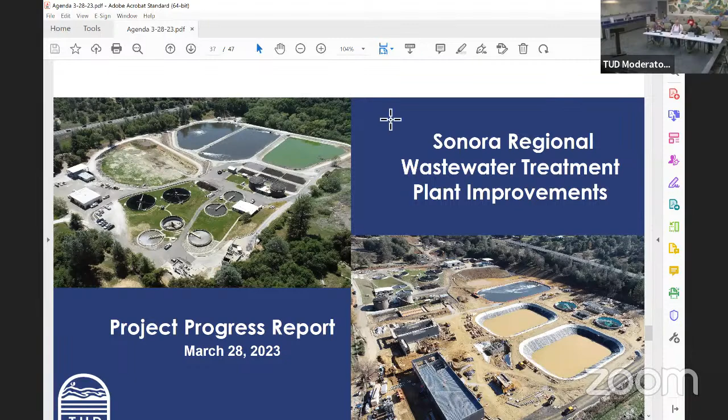I do want to let you know that Jennifer, who really should be the person giving you this report, happens to always be at a meeting at the job site on Tuesday mornings at this very time. She is essentially full-time. We've pushed some of the other capital projects; this is one of 20 capital projects we have on this year's schedule. We've tried to take some of her projects and shift those over to other staff people to really dedicate her time.

We also have our inspector on site, which is a contract. Mountaineering Engineering is also there, sometimes more than full-time. He does have overtime from time to time. And then as well, PACE, Pacific Advanced Civil Engineering, our design engineer, also has at least one staff member full-time. In addition, we have support staff here on the operations side with Michelle and Eric and the treatment plant operators, and Steve and his department in terms of processing payments. So we've got a lot of people involved in the project.

I would say most agencies probably have more than just one person at the staff level dedicated to a project of this size, but Jennifer's extremely efficient with her time. We're providing a lot of good value to the ratepayers on this project by trying to minimize our overhead and soft costs and maximize the amount of dollars that go into actual construction.

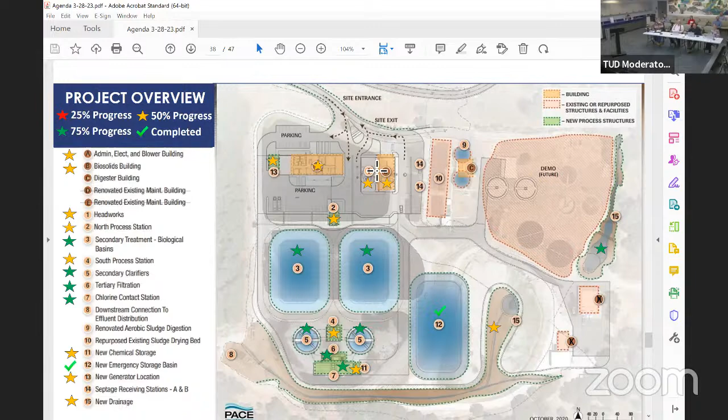Our monitor is not changing as you're— No, I'm trying to, I'm moving my mouse, and when I move it, it's got a lag. So I apologize, I don't see that. And it's not very bright either. Yeah, the mouse. Yeah, we don't see. Yeah, sure. Yeah, I need to change the format. Yeah, sorry about that. I should probably do this in PowerPoint, but anyway, I just did it right off the PDF. So I'll try to be careful when I'm using the pointer.

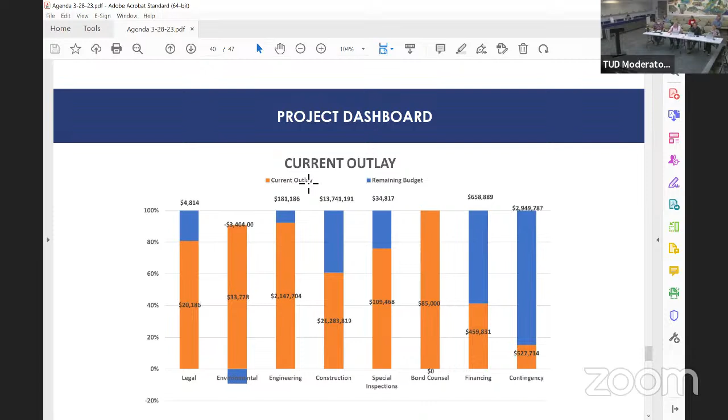Yeah, so you'll see that contingency shrink here. And ideally at the end of the job, Don gave us clearance to go a couple hundred thousand over budget on this project. So we're going to be managing it pretty tight, maybe we might be $200 thousand over budget at the end. Hopefully.

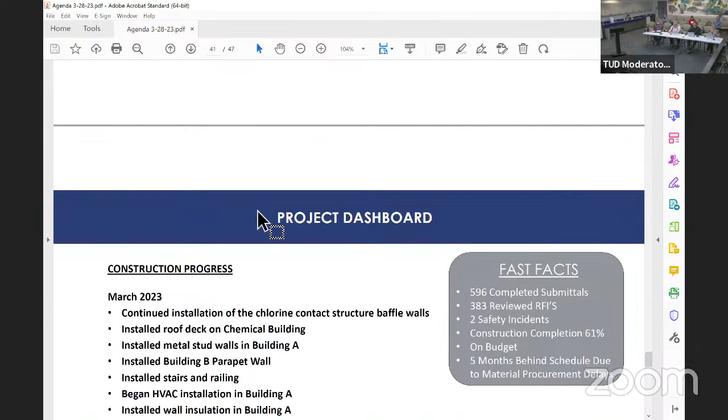This is Steve. I'll go back, you mentioned that we're into our reserves on this project. Steve, so I'll go back a slide even before then. The question was about reserves.

An integral part. And when we were dealing with USDA, critical component to USDA, originally we were approved for a loan and grant on a 20 million project, so we came back with a $40 million project. They said we could go up to the 25 million, but only if we provided as much reserves as possible.

My anticipation was at least matching. So at that time, sewer, wastewater, and reserves over the years, this is basically just about every bit of our reserve. So we committed almost $9 million to the reserves in order to get $8.5 million of grant. That's the way their grant's set up.

So right now it says USDA loan, but really we had to get a construction loan. So that money's sitting in the bank, we use that for construction. Then when the plant's totally done and operational, USDA will pay off the construction loan, and we start paying them for the next 40 years at a low interest rate. Like Eric said, we have to spend that money first, and then the very bottom is the grant money. We'll spend that and get reimbursed.

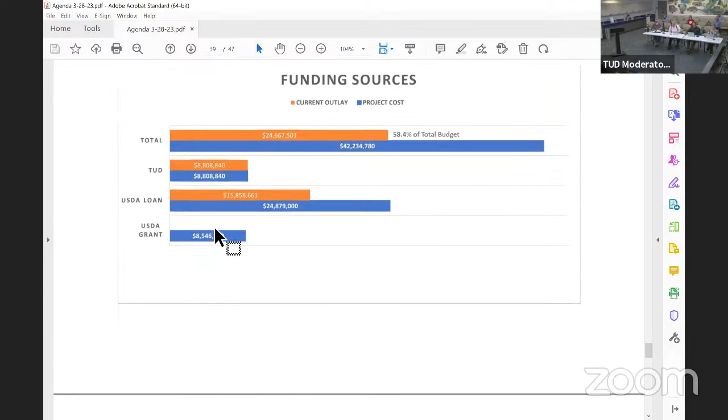A little bit redundant, just some fast facts about the project. There are 383 RFIs, requests for information. Those are details that the contractor needs because they need interpretation of the plans.

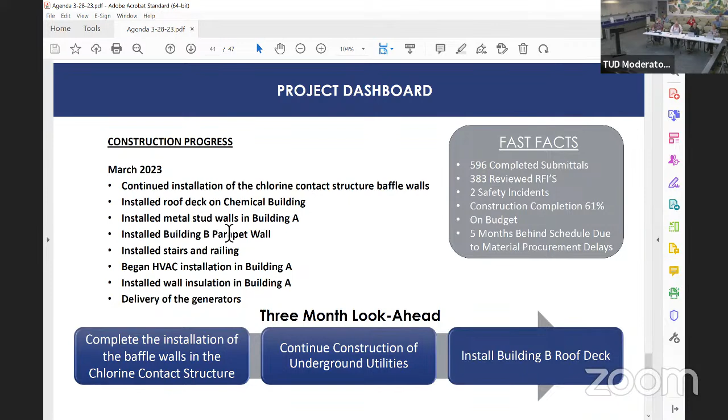The 3-month look ahead will complete installation of the baffle walls and the chlorine contact basin. There are still underground electrical conduits and air lines that need to be done. But with all the rain, the site is pretty muddy, so we'll need to wait until we dry out a little. Getting the roof deck and eventually the membrane roof on top of building B will be a high priority so they can work in all weather conditions inside.

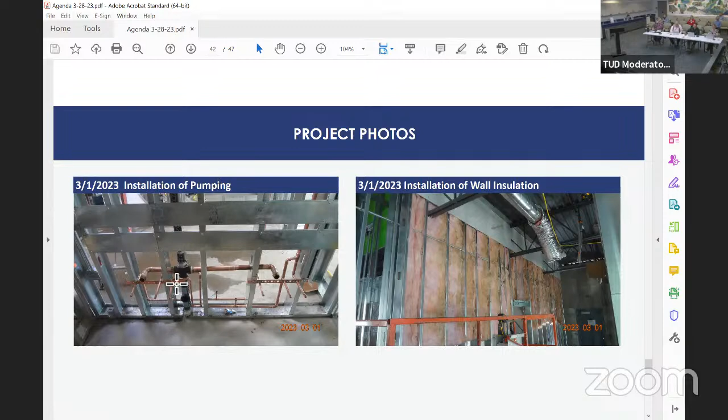A couple photos and we're getting toward the end here. This is an error, it says installation of pumping, that should be piping. I don't know exactly where this is, but I think this might be in the restroom facility in building A. You can also see insulation being placed in the walls, and the HVAC ducting is in.

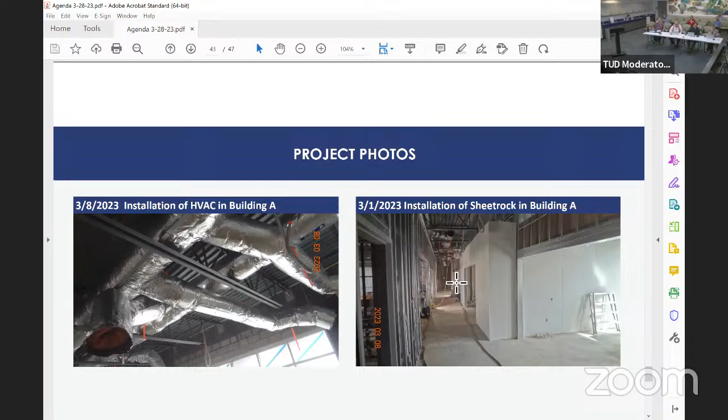The cake, as they call it after the water's been squeezed out, will drop into the trailer and be hauled off the site. Or in the future, it may be stockpiled on site so it can dry a little bit more before we haul it off.

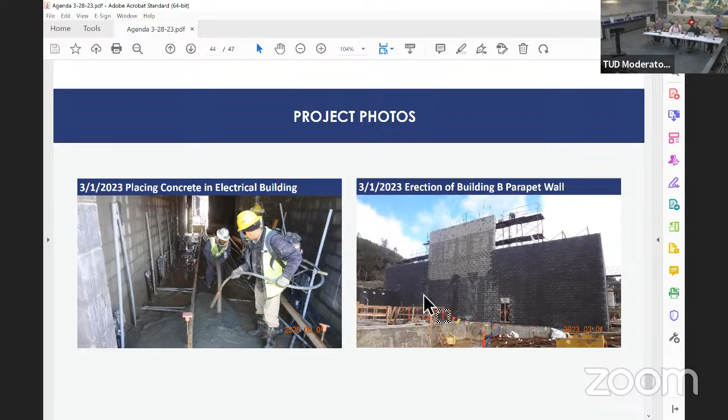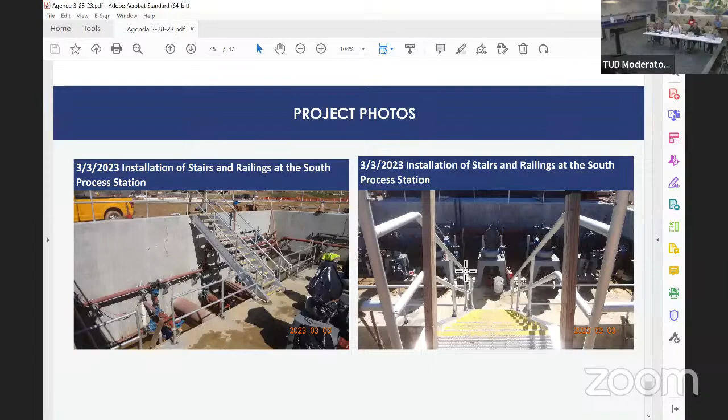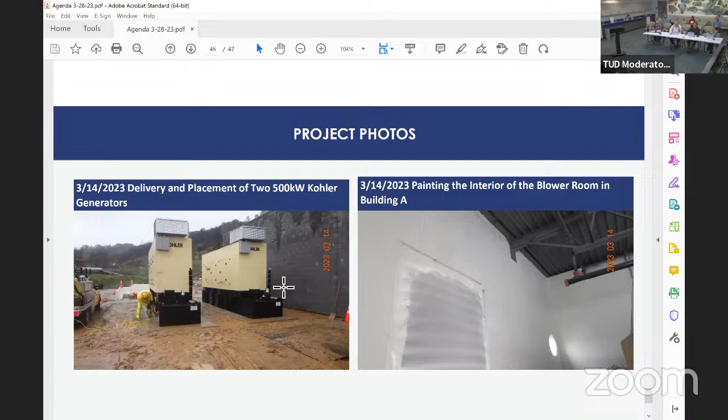On the right you'll see some of the pumps, and here are the new generators that were craned into place just a couple weeks ago. And some of the painting.

Then there's an overall view. I've been a little long-winded, thanks for your patience. Usually we just gloss right through these, but we had a light meeting and it's been a while, so I thought it would be a good opportunity to bring you guys up to speed. Happy to answer any questions.

So, a week ago or so, I found this really interesting article on septic processing, I guess you'd call it. I gave it to Dawn, and with great disappointment, I heard this morning that we've already bought the septic equipment and so on. So I guess my question now, now that we're on the hook, is whether the equipment that was ordered and purchased is really good. I hope it'll be as low maintenance as the one I gave to Dawn.

And number two, that the new equipment will have a way to accurately track what's being dumped and by who, and also a way to charge a legitimate fee for that process. I read that article this morning, and it was a little light on details of the specific equipment, like Lakeside Manufacturing and whatnot, but I have a pretty high level of confidence this system will perform well. They made it sound like the only maintenance was cleaning the rock trap out. This will have a rock trap, ozone, and a very robust screening system.

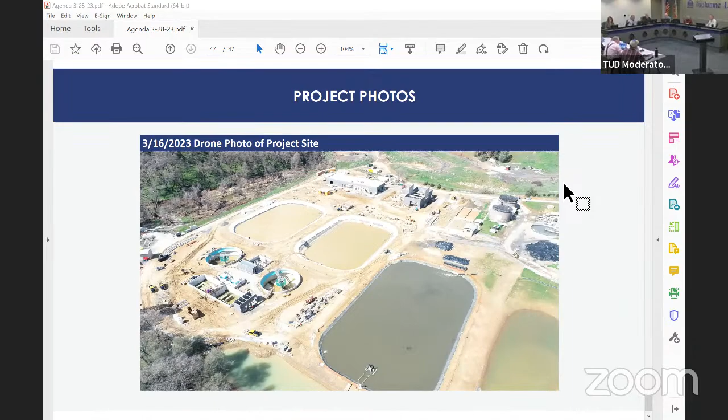I don't have a lot to provide you. There hasn't been a recent Natural Resources Committee meeting that I've attended. Hasn't been a recent Water Policy Advisory Committee that's happened that I've attended. And I know the most recent LAFCO meeting was canceled, so I haven't been to any of them. I'm sure everybody, TUD and all of our partners, is very busy with the storm. That's really the report there.

I did talk a little bit about the OES meetings. Emily and I have been working with the county on IDAs, initial damage assessment estimates. After we get them all done, it'll get turned into FEMA. We have a phone call with FEMA today. We have a tour with FEMA on Friday.

For clarity, we're talking about a new set of IDAs. We've already gone through a lot of this for the January storms, that event is one event. Now we have a new event, the February-March storm, that you're working on currently. Yep, it's getting to be a lot.